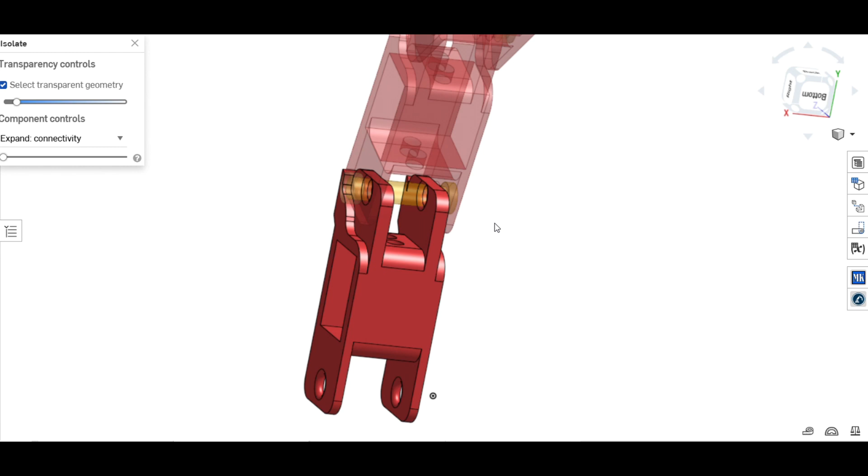The finger has an inside tab and an outside tab. Here, the outside tab is placed on top of the inside one to stack the fingers on top of each other. So if we remove this isolate, we see that the fingers stack nicely on top of each other. Now these holes are where pins go, and these pins allow circular movements. So as you can see, we can move the finger left and right.

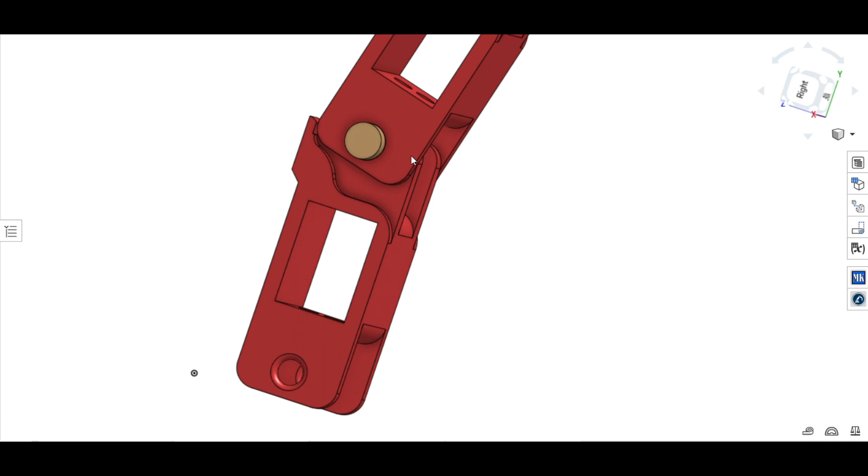These curves are used to limit the range of motion of the finger, and there are holes placed inside of the finger in order for string to run through them and control the finger. Practically, the string is wrapped around it in such a way that when the string is pulled, the finger closes. There was absolutely nothing wrong with it until I printed it out.

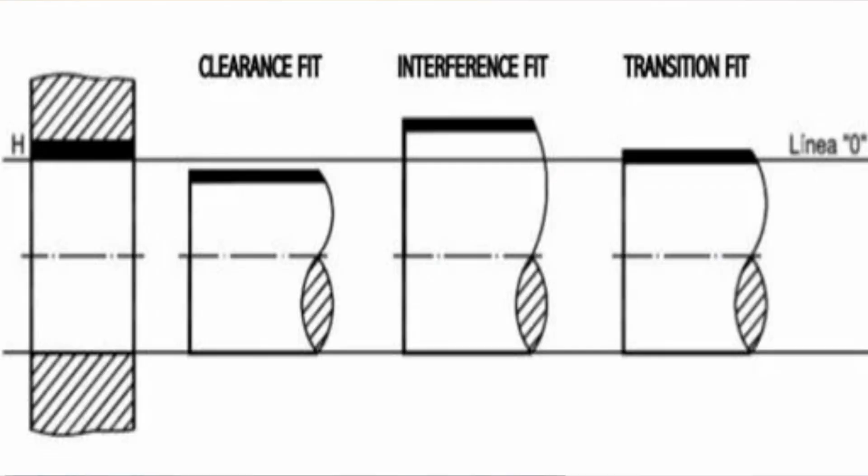So the biggest problem that I faced was tolerances. They're the sizing fit between two parts, right? So this pin that we have here, you'll notice that this diameter fits perfectly with this pin so that when you push it on, it snaps into place, right? But if the measurements were even slightly off by a few millimeters, then it doesn't fit together.

There's another problem in play though. It's the size of the pin. So if we take the finger and place the pin inside, there's really high friction between the pin and the finger, right? And that's an issue.

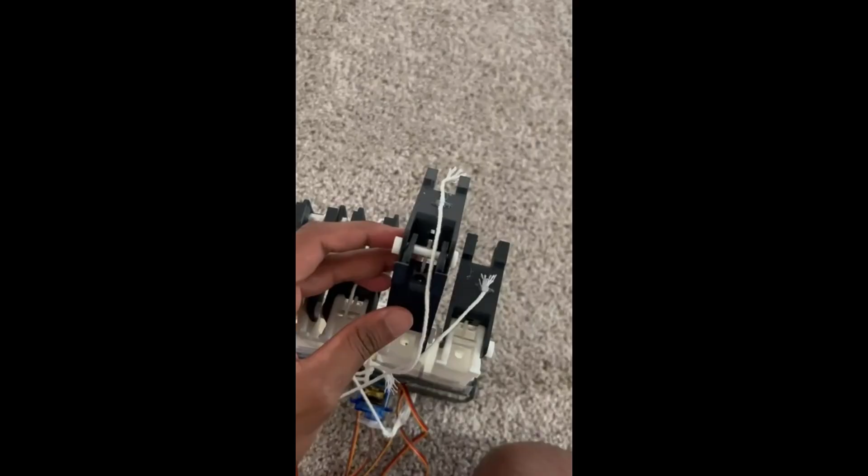Okay, so here's the finished product. See, there's the same pin design, except slightly smaller with tape in the middle, and this allows us to do two things. First, it's easier to customize the sizing so that you can just add more tape if you want it to be bigger and fit in the hole properly. And also it reduces the friction between the two fingers so it can move easier.

To find the tolerances of your 3D printer, you usually use a tool like this, but I didn't know that they existed, so I might have sold my kidney buying filament to manually test out all the tolerances by myself, one by one.

Now, the second problem was freedom of movement. Practically, I had to change the shape of the curve until the finger bent in the way that I wanted it to. Then I came up with a genius idea. Instead of using string to control the finger, if I used 3D printing filament, its restorative properties will bring the finger back to shape without needing to do anything.

Okay, it was actually because I was too broke to buy string. You think I'm joking, but I'm not. I've run out of paper a while ago, so I've been using the same piece of digital paper over and over and over again with my pencil that ran out of lead. Yeah, I've been through it all.

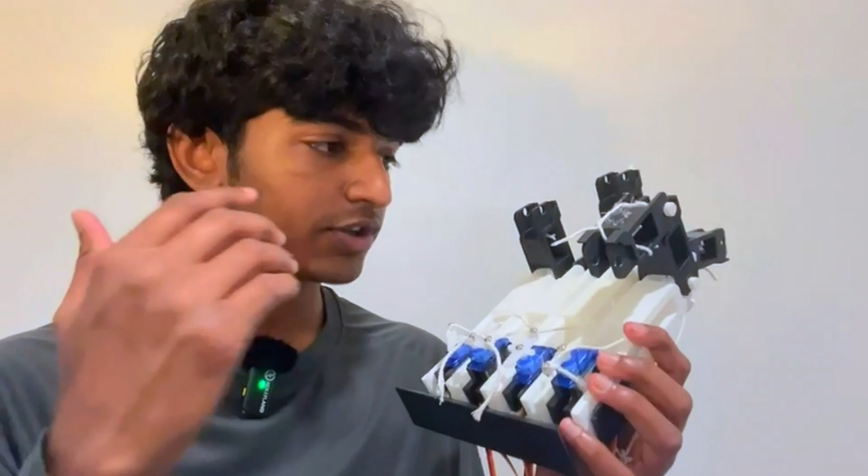Next is the servo system, which used a string connected to a servo in order to control the finger. Now, unfortunately, my first system wasn't strong enough. When I say too weak, I mean that every time the servo was told to turn, instead of turning, it would kind of struggle in the same place and then slip.

So, as the D1 overthinker that I am, I built a gearbox. It didn't work. So then I learned something really important. You can actually screw down the white arm into the servo. This immediately fixed the slipping, but the servo was still too weak. So I decided to change from PLA filament to actual string.

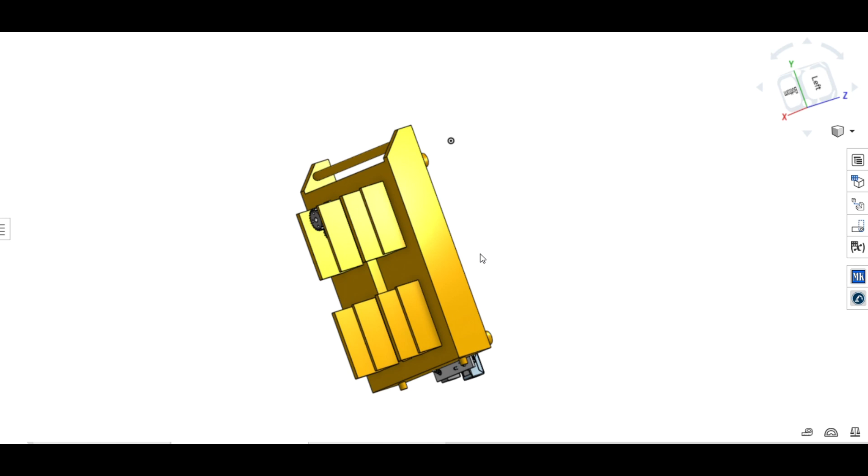So this is iteration 1. Yeah, one quick question. How the actual are those fingers gonna get into that bar?

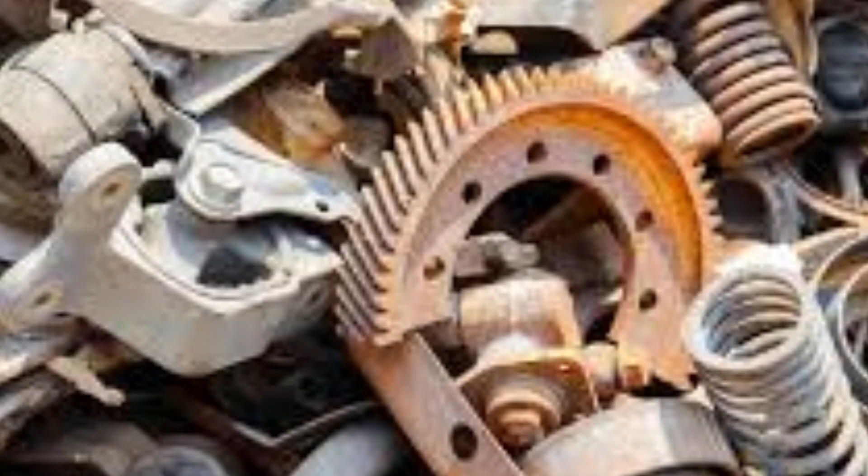So instead of scrapping the idea, I didn't want to waste all that filament, so I tried to double down and add an attachment piece. That clearly didn't work out so great. I finally decided to use my brain.

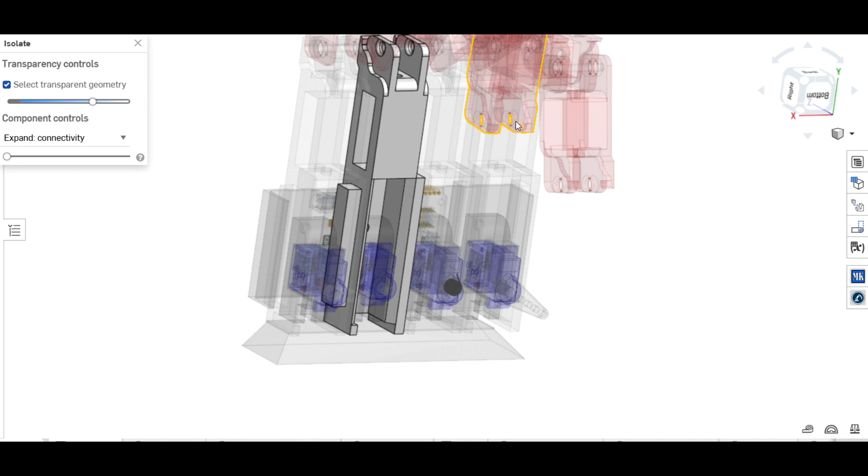So this is the palm of the robot, and as you can see, the top half of it is pretty much built like a finger. And what that does is allow free movement for the other fingers to kind of attach onto the top and move freely. The bottom half, however, is more of the palm, and it allows for connection between other palm pieces using these rectangular indents.

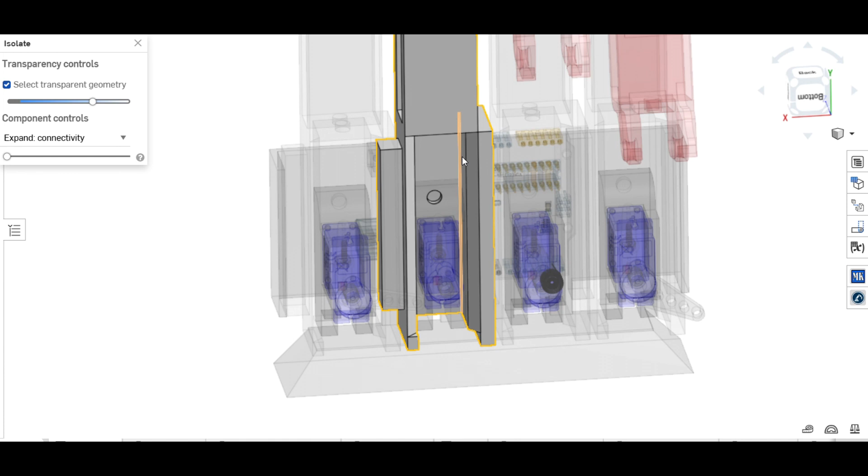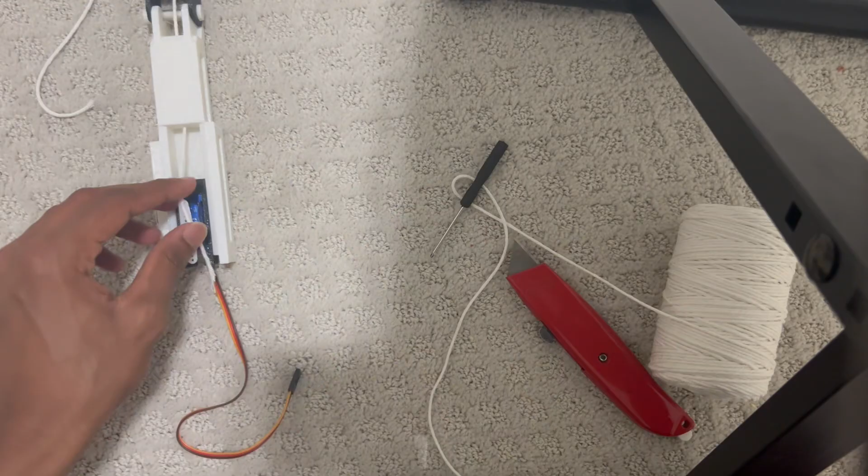So they can kind of just connect onto each other and infinitely stack up as many fingers as needed. There is also a space in the middle for the servo to fit in, and this servo will be responsible for pulling the string which pulls the fingers downwards. And then it worked. And in that moment, hours of hard work finally paid off.

And that's when I learned that it was never really about how much talent or skill you have. It's more about whether or not you can keep going even when times are rough. Remember, millions quit before they hit it big.

And that's why you should come to the Broken Engineers Casino on your next holiday, because that's where dreamers turn their dreams into reality.

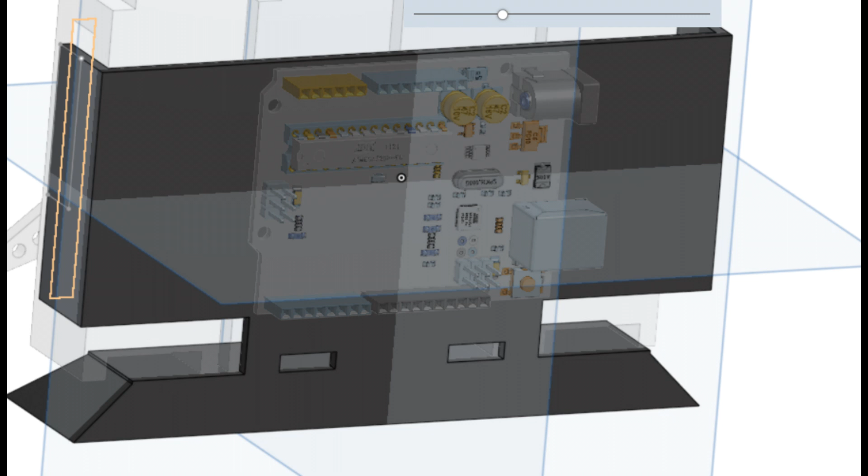Anyways, the hand's done now. The handstand lets the hand stand. The problem is that the string only pulls the finger in one direction. So when this is turned and the finger comes in, there's nothing really to put the finger back down.

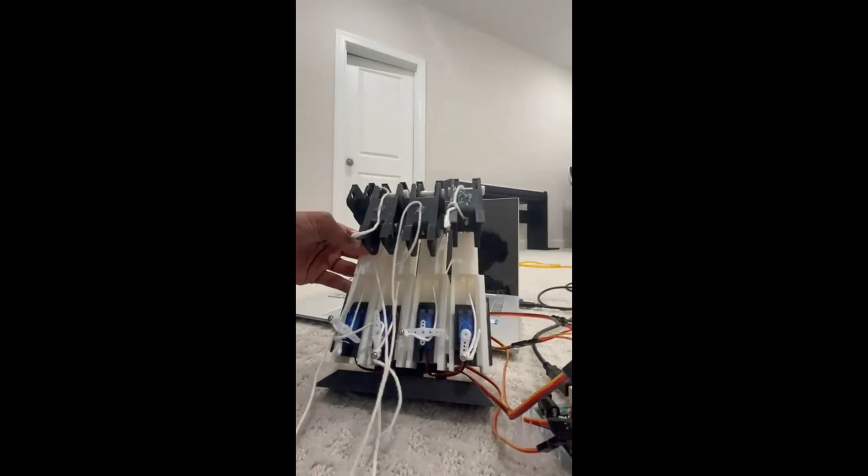In my first design, I tried to use a polyurethane rope to pull the finger back in place. It works fine when there's only one finger piece, like in this clip, but once there's two, it doesn't work as well. The way the system works is by taking the same concept that we used in the front on the back side, except this time it's pulling the finger back upwards.

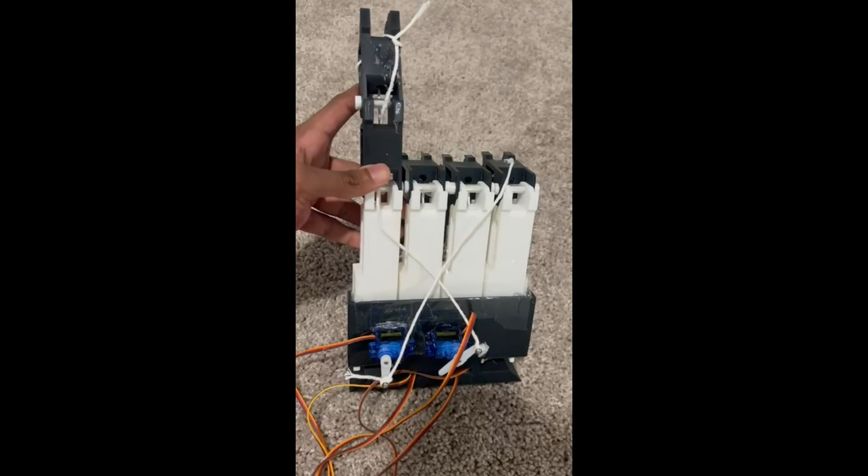Unfortunately, I ran out of servos, so I could only get 2 of the fingers to work. But hey, 2 out of 5 work.

And that's better than the student participation in group projects. Hey, I'm gonna be a senior next year, so I think I'm gonna be part of those 3 this time. Yeah, no one's believing that.

I think this project taught me a lot of lessons. Firstly, it just humbled the hell out of me, mainly because it was such a simple project, but I think because of that I kept jumping straight into the process instead of taking the few steps backwards that I really needed. And that brings me to my second point, the importance of prototyping.

So prototyping is making smaller versions or a model to test out if the idea works. I think because I didn't do that, I ended up making multiple iterations of the hand, wasting a lot of filament and time, and also slowly losing my sanity.

The next thing I would like to say is the importance of research, which again comes with the few steps backwards. See, it's important to not reinvent the wheel, which I think I did a lot of the times, because a lot of people online have already found solutions to the same problems that you're facing. It's just important that you're able to take their help instead of trying to solve everything yourself.